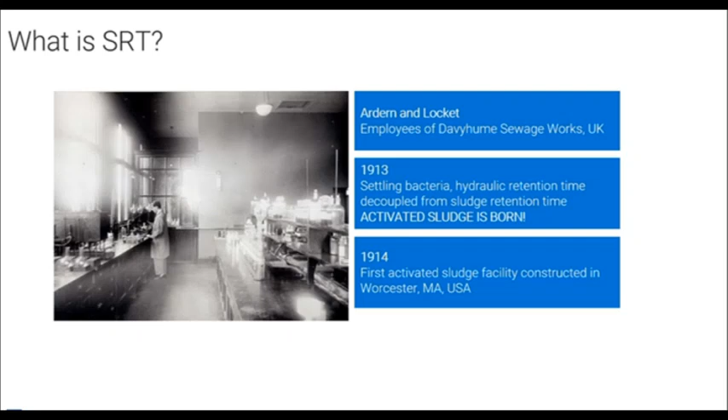So when we think about SRT, this is kind of what the equation looks like when we start defining it. It is, as Carl said, really the solids retention time. A lot of times, most of the time, we're referring to it as the aerobic SRT, the aerobic part of our aeration basins. We'll get into why we're specifically referring to it as the aerobic part.

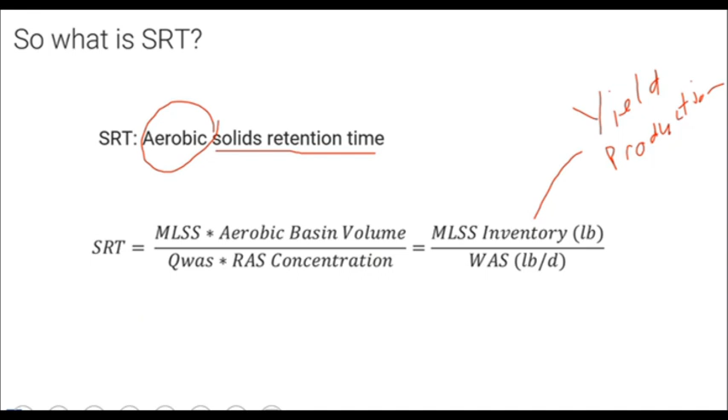But what it really comes down to is what we're measuring is the mass of our inventory. This is the previous session where we looked at yield or production of sludge - how much inventory is in our system versus how much of it are we wasting out. This is our control variable.

We're able to control this variable here, our WAS. And the SRT is something that we set. This is our target - we want to target an SRT, and we'll get into how we develop that target.

If we start breaking down these high-level terms of inventory - inventory is just how much biomass you have in the system. What's the inventory of your grocery store? What's the inventory that you have available to you? That's really coming down to your mixed liquor times your aeration basin volume to get that mass of pounds in the system. That mass of pounds is really bugs - what bugs do you have available to do work for you, and what work do you need done?

That variable is largely controlled by what kind of food you have coming in and a bit of what SRT target you're picking. And what's really controlling that then is the SRT target, and when you pick that target, the variable you really have to control is this QWAS target.

We're able to control our wasting rate. Generally, a plant has a fairly consistent RAS concentration - it may change a bit, but in general each plant has a specific RAS concentration they typically see. And the variable you're controlling is this QWAS, which is controlling that wasting pounds per day.

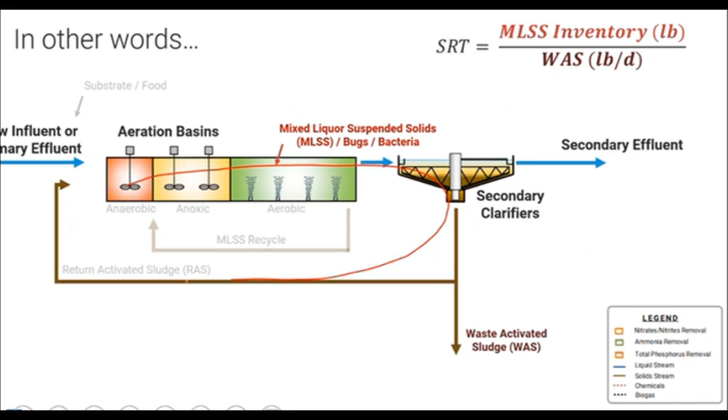So looking at this from a process flow diagram in our aeration basins, when we talk about that sludge retention time, what we're really talking about is retention within the system - we're recirculating around in a system. And that allows us to decouple the liquid flow from the sludge flow.

So if I flip to this next slide, we're going to have the same system. I think I saw more Denton Creek people on today - Colby, I don't know if you can type, Carl might have to do it for you. So we're going to calculate the HRT of AB3. To calculate HRT, we need the liquid volume of AB3. What's the liquid volume of AB3?

Good question, I think it's rated for like 1 point something. Let's call it 1.4, Carl - how does that sound, 1.4 million gallons? Yeah, like 1.4 million gallons. And you're usually sending 6 MGD to it? Give or take, yeah, let's call it 6.

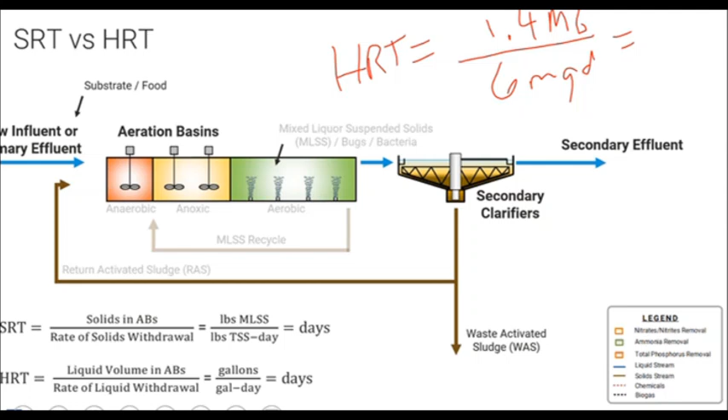So if we're looking at calculating our HRT of our system, we're taking our volume, so 1.4 million gallons, divided by 6 million gallons per day, and that'll give us days. So can anybody besides Carl do the calculation and answer it? I want it in hours, not days.

I'm looking at the chat, so if you want to put your answer in the chat, I'll see it too. All right, does anybody have the answer in days? How about that? There we go, we got Miguel - he said 5.5 hours.

That's right. So if we were to do the previous calculation to walk everybody through what Miguel did, if we did the first part, we'd get 0.233 days. So if we have days and we want to convert to hours, I find it best to break it down into a fraction multiplication so you can cancel your units. If we're trying to get days into hours, we need hours on top. We know that 24 hours equals 1 day, and that way our days cancel out. Then you end up with 0.23 times 24, and that's where you get your 5.5 hours.

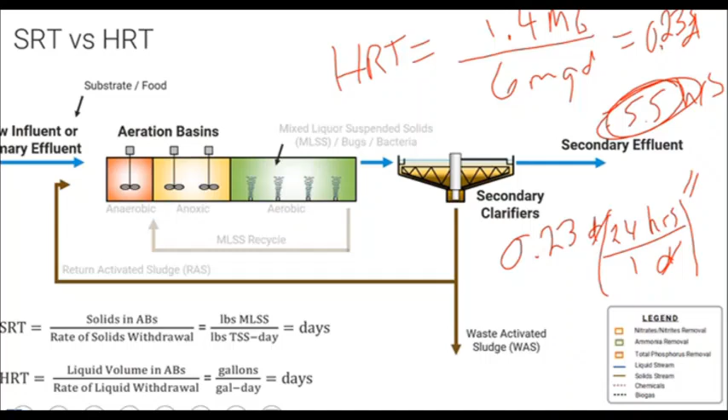5.5 hours. And the point of doing that is to show you the example of our HRT - our water flow going straight through the plant is about 5.5 hours for this aeration basin.

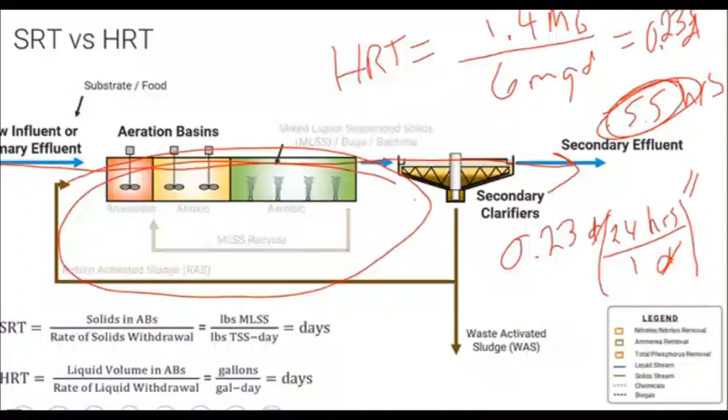But the SRT of this system, Carl, what's your SRT of AB3? Right now, Jacoby said 4.6. 4.6 - so yeah, that's where you get this decoupling, you're separating the two. HRT does not equal SRT, they don't equal. Miguel, how does that compare to a digester? Do HRT and SRT equal in a digester?

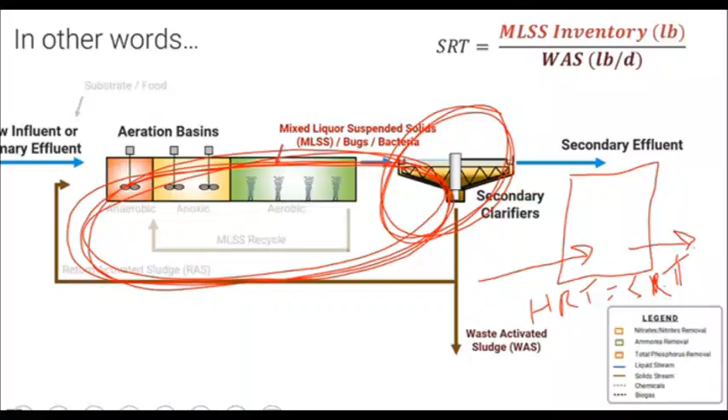So if I were to draw a digester similar to this, we can call it a secondary treatment system. We send solids to it, and we send solids from it. There's no clarifier. So to have a 15-day, and Miguel, you're right, HRT equals SRT in a digester. So if I have a 15-day SRT requirement in a digester, I need a digester that has 15 days of volume. That's where you get very large digesters. But when we have a clarifier in our secondary treatment system, this is what allows us to separate the solids and not have a very large aeration basin. So that's kind of the point of all the RAS flows and recirculating it, is to reduce the size needed for our systems to get to that 4.6 or 10-day SRT.

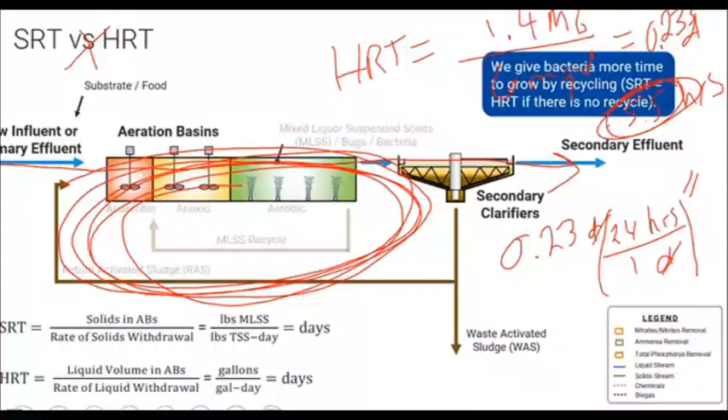All right, so we have a problem here. I am going to give what I want you to do, and then I'm going to give people some time to solve it. So we're going to calculate wasting with SRT. We want to calculate our current biomass in the system, how much mixed liquor or inventory do we have. Then we're going to calculate the mass-based waste based on a target SRT. And lastly, I want to calculate the volume or the gallons to waste out of our system.

So to do this, the first step we're going to do is calculate our biomass inventory. Then we're going to take our inventory and use an SRT target to get a mass to waste - how many pounds per day are we going to waste. And then lastly, we're going to use an equation to get how much volume that equates to when I'm wasting.

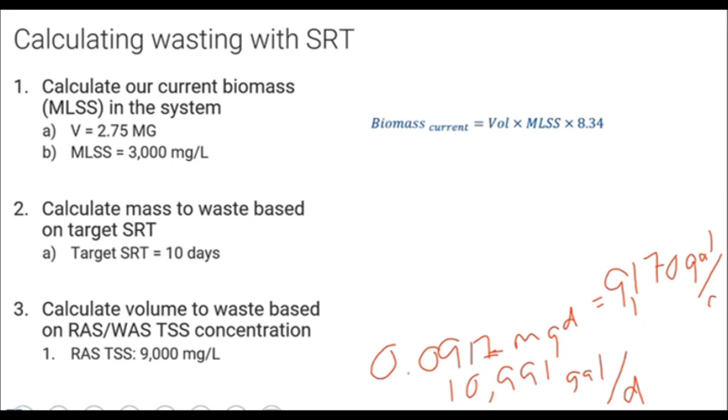Let's start at the beginning then, and let's see if the answer is one of those or is it something else. So our biomass of the current system, we have 2.75 as our volume, times 3,000, times 8.34. And that's what Miguel put in the chat.

And Miguel had 68,805, and that's pounds. So that's our inventory - that's how many pounds we have in our system. Does anybody, as we keep going through, know what this 8.34 is doing?

It's the weight of a gallon of water. That 8.34 is our conversion to pounds, the weight of a gallon of water converted to pounds. If we put something in terms of milligrams per liter times million gallons, or MGD, and multiply by 8.34, that gets you pounds. Whether you're using pounds versus pounds per day depends on whether you're using MGD or million gallons, so it's whether you're doing a volume or a flow rate.

All right, I'm going to go to a different slide because this slide's getting too busy.

Equations. So we're going to do our mass to waste. We set 68,805 as our biomass inventory, and we set our SRT target as 10 days. That goes down here, and this answer gets us 6,880 — we'll round it to that. That's pounds per day, and that's how much we have to waste today. That's our mass we need to waste.

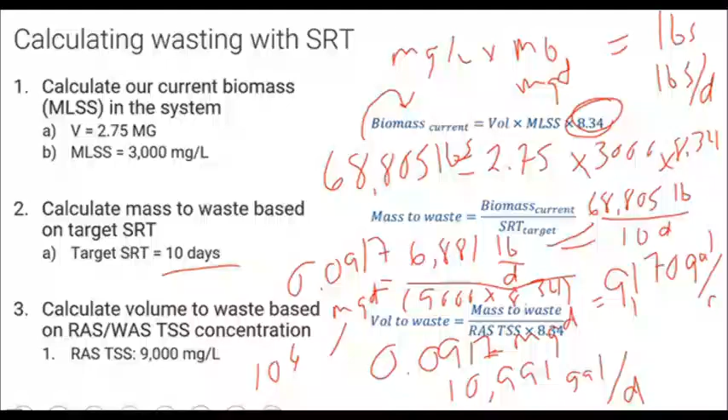All right, I'll keep going here. When we do have the slides out there, and if you're going online to see them, the answers will be in here. We have them kind of stepped through in a very poor fashion.

All right, so now we've figured out how to calculate wasting. We've gotten that far. We can figure out yield — we can take our BOD coming into our system and estimate how many pounds we'll yield. From those pounds we yield, we can estimate our mixed liquor concentration. And from that mixed liquor concentration and inventory, we can use an SRT target to develop a wasting target. So now we're building our toolbox of equations and knowledge of how they all relate to each other.

When we think about it, what we can start understanding is that when there's a change to influent loading, our biomass is going to respond. So if our BOD goes up, our mixed liquor is going to go up. If our mixed liquor goes up, and you don't change your wasting, that may mean your SRT is going to go up as well. If you adjust your wasting, that'll increase your WAS fraction to maintain the same SRT.

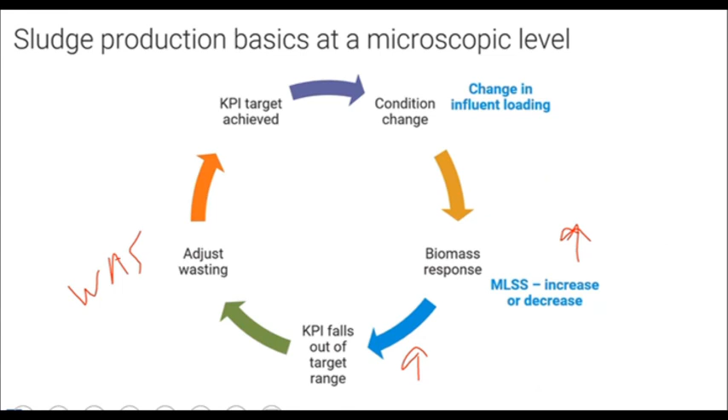It's a matter of doing this calculation each day and creating a habit — forming habits so that you're able to manage the solids in your system as they continue to change. These habits should really start to be formed on a daily basis. It may seem intimidating, but once your system is at steady state, it's minor adjustments every day. You shouldn't have any drastic adjustments each day; it should be minor.

What I'd encourage each plant to think about is, maybe by 8 a.m. you have your mixed liquor from the previous day or night. You have your SRT calculated, and you say, my SRT target for today is 7 days. Then you do a quick calculation and figure out how many pounds and gallons you need to waste from the system. I assume you coordinate or communicate that with your operators about your target wasting for the day, and then you go about doing other things. This should be something that occurs every day — you're setting those targets, but then you can generally go about the rest of your day.

What are some key samples that you'd want to run to do these calculations every day?

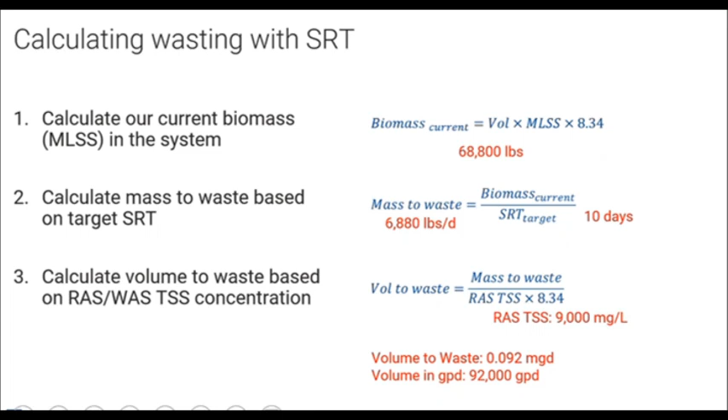What are some samples? If we go back to these equations, what are some of the things that you need from the field? What are we relying on operators to go grab samples of? Colby said the mixed liquor, so that's one of them. And the RAS TSS, that's the second one. Those are the main points.

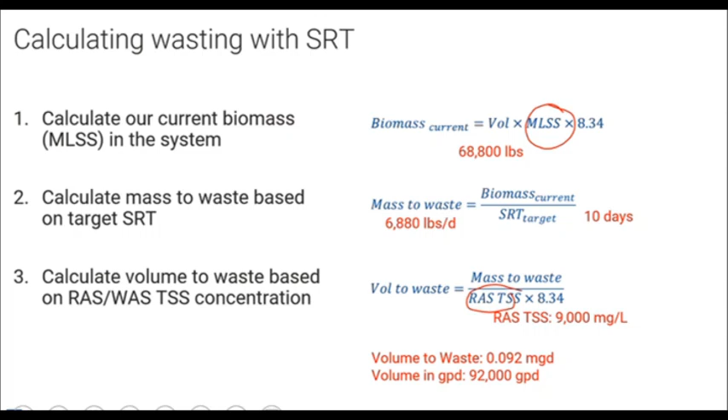When we're looking at our volume to waste, we're relying on flow meters. Hopefully those flow meters are good. But in general, when we're talking about these mixed liquor and RAS TSS numbers, most of you on this call are grabbing those samples and testing that mixed liquor and that RAS TSS. So it's important, if you get a number that seems wrong, to ask yourself, does that seem right? Should I go grab another one? Or maybe I ignore that one and take the previous shift's number because my number was double theirs. That's why these samples are important, because they play into your calculation and understanding what the mass in your system is, because you don't want to overwaste or underwaste your system.

Lastly, KPI. Miguel asked what KPI was. Sorry for using these terms. KPI is key performance indicator.

So if I have KPIs for my plant, one of my KPIs could be that I want - if Carl says we need to waste 91,000 gallons today, and he tells Colby that's a KPI for Colby, Colby needs to try to achieve that KPI today. It's like a goal, a fancy word for goal.

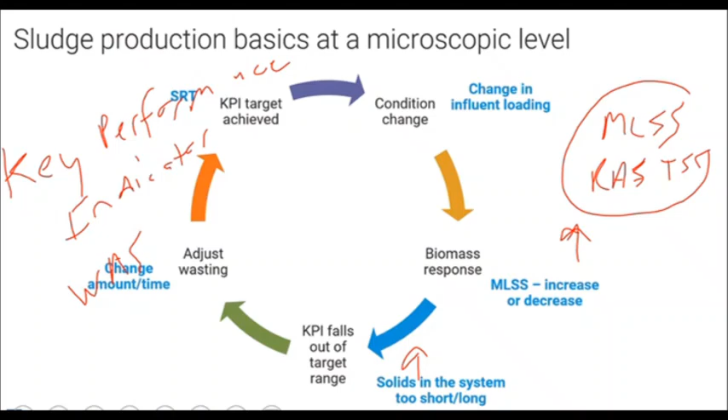So what drives our SRT selection? Now that we kind of know how to calculate wasting, how do we get that 10-day number? How do we get that 7-day number? How do we get 4.6? What is driving that SRT selection? Our SRT selection is really driven by what we're trying to do in our system.

So if we look at what we're trying to do in our system, are we trying to remove BOD? That's taken place by heterotrophic organisms. You don't have to necessarily get caught up on the word heterotrophic, or how to spell it or say it. Heterotrophic organisms are kind of the workhorses of our aeration basins. If you were to look under the microscope, over 90% of what you're looking at is a heterotrophic organism, probably more than that. So most of the bugs you see under a microscope are heterotrophs. They're doing a lot of our BOD removal, and there's lots of them, like millions of them.

If we were to think about how to describe heterotrophs to the larger world, I would describe heterotrophs as all the animals on Earth. There's a bunch of different types of animals that can eat our BOD, a huge variety of animals that can break down BOD. From that standpoint, BOD removal is typically very robust. You usually don't have issues with BOD removal. That's one of the things that is usually pretty straightforward. If you're settling your solids, you're usually removing your soluble BOD. These heterotrophic organisms are resilient and they grow fast, and there are so many of them that if one doesn't grow, another one will - a different type will grow.

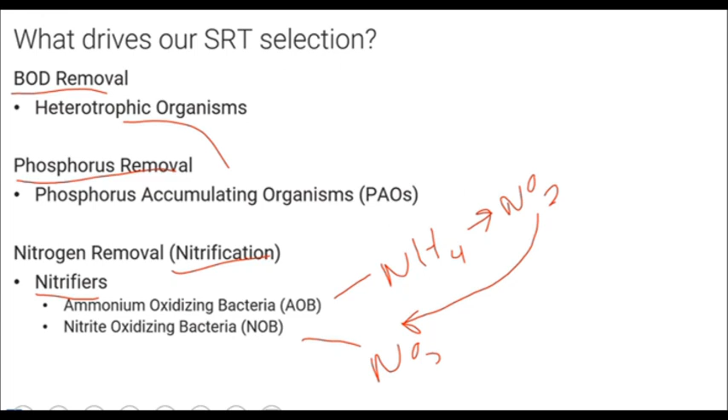The next one is nitrogen removal. So that's nitrification, and every plant has nitrification requirements. When I'm talking about nitrogen removal, I'm talking about removal of ammonium. To do this, we have what we call nitrifiers in our system, broken down into two different main bacteria. We have ammonium oxidizing bacteria, or AOB, which take NH4 to NO2, so they're taking ammonium to nitrite, and then they pass that nitrite off to the NOB, who take NO2 to nitrate, and that's what leaves your plant. So within our plant, we're taking ammonium and converting it to nitrate, which leaves the plant.

We need bugs to basically work together, handing things off from one to the other. When I'm having conversations or phone calls with people talking through some issues at their plant, one of the things I may ask is, have you taken an ammonium sample?

We'll get to why. The second thing I might ask is, do you have any nitrite kits? The reason I might ask about nitrite kits is because one of the first things that starts to pop up is the handoff between these two bugs becomes disrupted. So if you start seeing nitrite, that means you're having incomplete nitrification. Something about these bugs is upset. We'll get into why we're looking at these versus BOD.

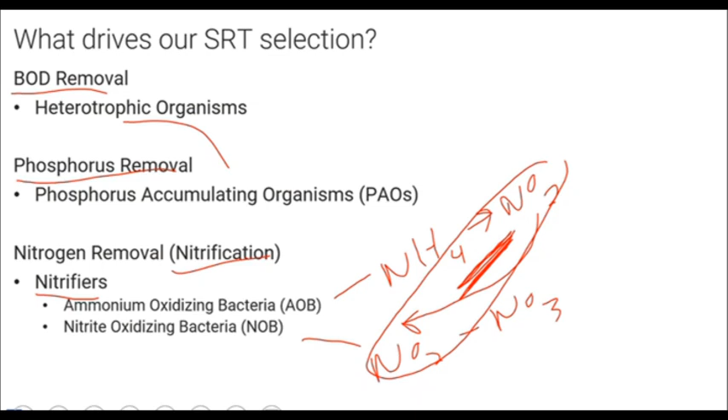So when I look at BOD removal, again, we're talking about those heterotrophic organisms. When we talk about growth rates, that's what this is. This doubling time is growth rate. So for one bacteria to make a second bacteria, heterotrophs take 3 to 10 hours to double. So to go from 1 to 2, they can do it as quickly as 3 hours. And if you remember, when we did the HRT calculation in our aeration basin, our aeration basin had a 5.5 hour HRT.

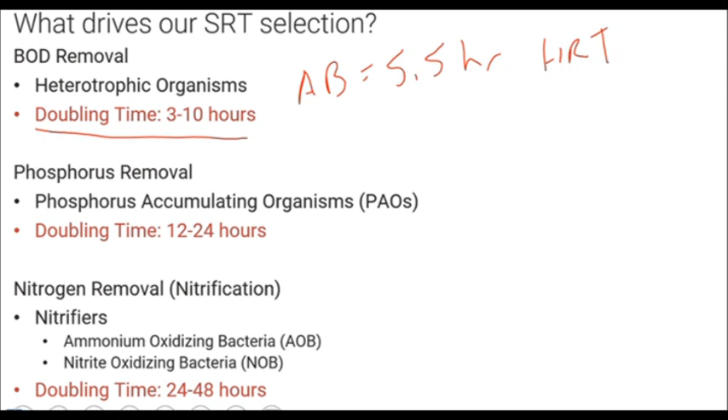So now you can start to see, when they first had systems back in the day where they just aerated it, they were growing heterotrophs. They just weren't growing that many. The HRT might not have been quite long enough. It wasn't getting as high of removals as we do today, but they were still getting removals. But as soon as they started recycling it, going from just passing through once to recycling it, they started seeing even more removals because you're giving them longer to grow. So your inventory is going up.

Now as we keep going, those are relatively fast growers. Our PAOs, their doubling time is 12 to 24 hours, so they're a little slower growing, but still have a pretty quick doubling time. And the worst doubling time is the AOB and NOB, which take 1 to 2 days to double. So if we're talking about 1 to 2 days to double, that's the slowest growth rate out of all of these.

So when we think about our slowest growth rate, if we want to nitrify, which we do, we want to have these bugs in our system, we need to give them at least the amount of time to double. One bug needs to be able to create another bug. Otherwise, if they don't have enough time to create another bug, you're going to wash that bug out and you won't have it left. So you need to give it enough time to double, and that's what we call washout.

So washout SRT is this doubling time. So if we're operating below washout, it means our bugs are getting wasted faster than they can produce.

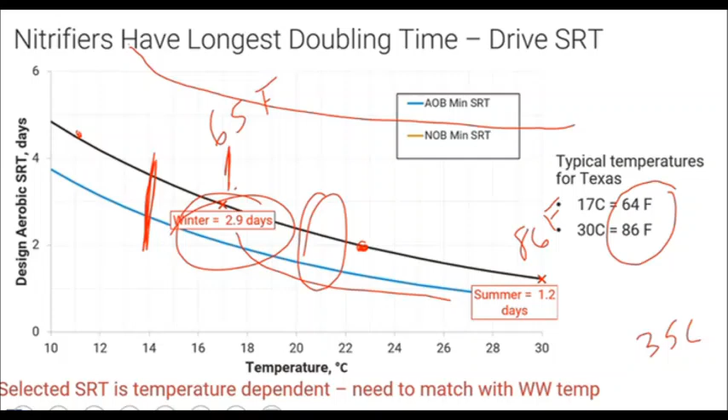So methanogens are where you're trying to grow in a digester. Each bug has its own curve. I could even show a curve for heterotrophs, and that curve is going to be something like way down here. So all of these are just related to temperature and growth rates.

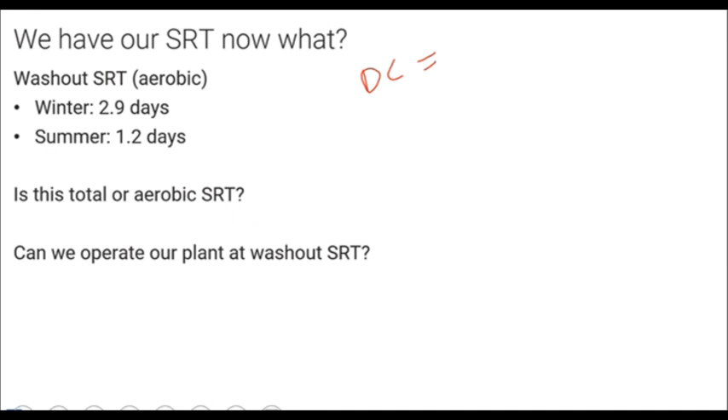So now let's go through our SRT. I think we have Denton Creek on the phone. So we're going to talk about safety factors. What we normally do, if these are our washout SRTs, normally, if I'm an engineer designing your system, I'm designing at a 2 safety factor. So I'm taking your minimum washout SRT and putting a 2 times safety factor on it.

So my winter now becomes 6 days, and that's what you can operate at in the winter. My summer, I'll round up and we'll just say 3 days, when it's warm out, I can get down to 3 days and operate with a 2 safety factor. Generally we call that safe enough. There are plants that maybe need a higher safety factor, and those are very specific use cases.

When I say a plant might need a higher safety factor, I'm talking about like ski resorts, they might need like a 5 safety factor. Ski resorts are crazy because they go from no load to huge loads over the course of a day.

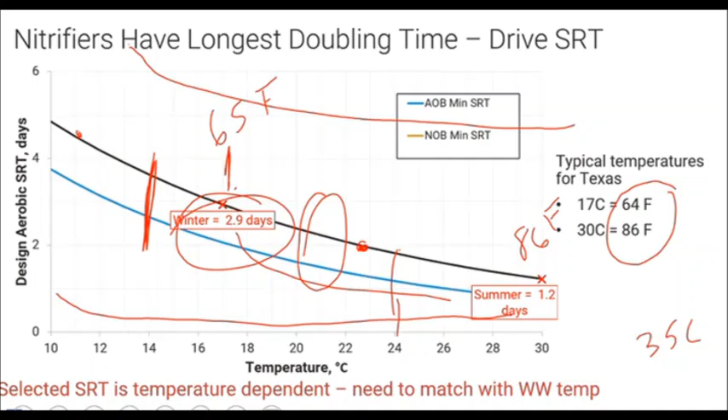But let's calculate the safety factors for our plants. We're going to go ahead and assume that our washout SRT right now, that's what this W is. I don't know, let's go up here. Let's look at, let's say it's probably 24 degrees right now - this is water temperature, so let's say it's 24 degrees. So our washout, let's call our washout 2 days. So our minimum right now is 2 days.

So we have Denton Creek on. I'm sorry, who else was, let me look at my phone. Guess I think we just have Denton Creek. So Colby, I think you said your SRT was 4.6 days.

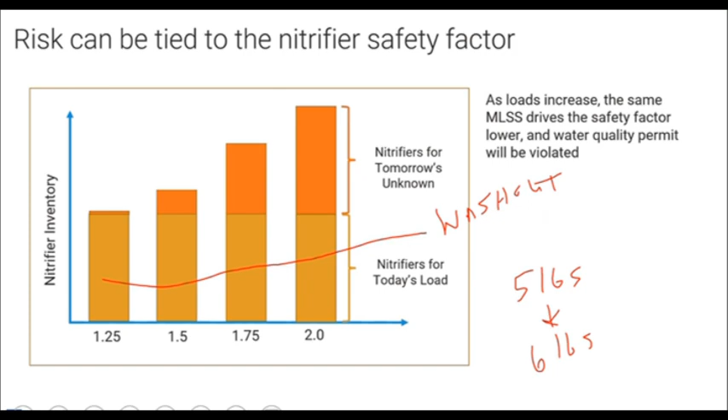So if today I'm treating, let's say I'm treating 5 pounds today. If I have 6 pounds come in tomorrow and I'm operating at washout, if my nitrifiers take 1 to 2 days to grow, it'll be tough for me to accommodate extra load. And that's why we start talking about these safety factors, which is what's on the bottom, this SF. And we're starting to build extra inventory. So we're building that extra inventory, and that way, if we have something higher come in tomorrow, we have extra bugs there to do it.

Eventually, this levels off though. So running a 100-day SRT, it doesn't just keep increasing and be beneficial. Eventually what happens is that you have so many bugs in your system that they're dying faster than they're growing. So it's really going to start to level off as you start increasing that safety factor higher and higher. There's only so much bang for your buck you can get by having a higher safety factor, just because typically from day to day, you can't carry an inventory if you don't have enough food to feed your inventory. So that's the kind of balancing act you're playing here.

Any questions? Yeah, go ahead, Carl. Real quick, just a good comparison.

We can talk about when Denton Creek was taking on the crazy flows we had in quarter 2 with the rain events. We were down close to that two-day safety factor, where what was critical was that as the months went on, the loading got higher as far as BOD. Ammonia was still diluted due to I&I, but the BOD was higher because of settling out in the system.

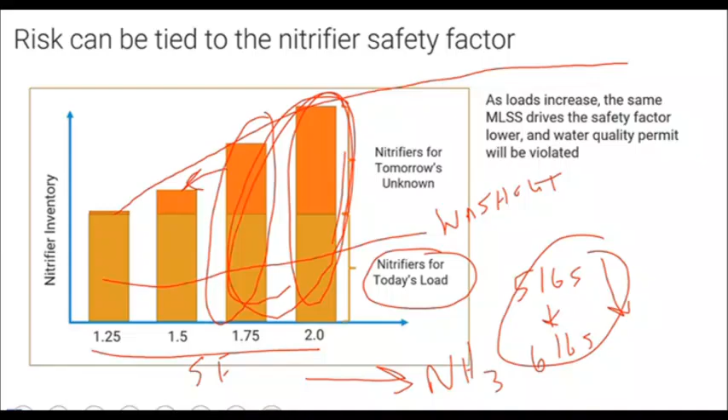And I think for the Denton Creek staff, all of these slides are a very good learning opportunity of what you did and what you will continue to do for the next year to two years. You're really trying to - I'm not saying you're going to keep pushing your safety factor down lower and lower, but you're really trying to get in this range here, because what happens - let's see, I don't have a slide on it.

So if I operate at a safety factor, to get to Carl's point and what Carl was balancing - what Carl was balancing, or Denton Creek, all the staff were balancing, was: if I operate at a safety factor of 2, so let's say my washout SRT is 2 days, my safety factor in this case is 3, and over here the same thing, but my safety factor is 2. What is my SRT that I'm operating at in both cases?

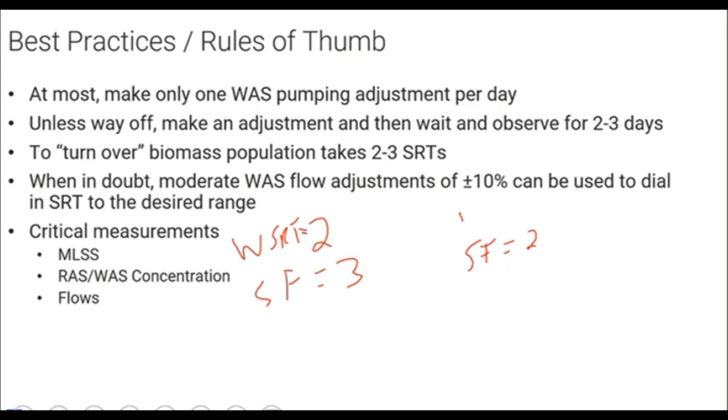So we'll call it case 1 and case 2. What's my SRT in this one over here, if my washout's 2 and my safety factor is 3? So if my minimum SRT is 2, but I'm operating with a 3 safety factor, that means I'm operating at a 6-day SRT.

Sorry, okay, I'm being kind of confusing. Now if I take my case 2 and I'm operating at the same temperature, so 2 days, and I'm using a 2 safety factor, that means in this case I'm operating at a 4-day SRT.

And so those two cases - this is why we're getting into the safety factor and how the safety factor and SRT compare to capacity. Is my mixed liquor going to be the same in both of these? More than likely, no. This one over here, maybe it's going to be 4,200, and this one over here, maybe 3,500. And this is where it comes down to: your SRT determines your plant capacity, because this plays into your clarifier now and your blankets.

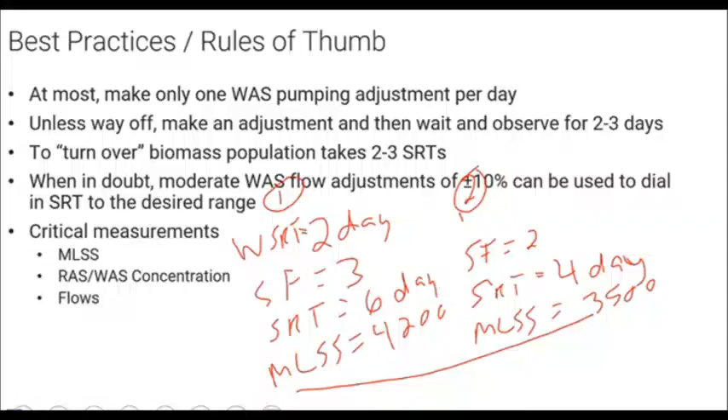You know, sometimes, Carl, I wish people would just say, I'm doing it because Eric said it. But any last questions?